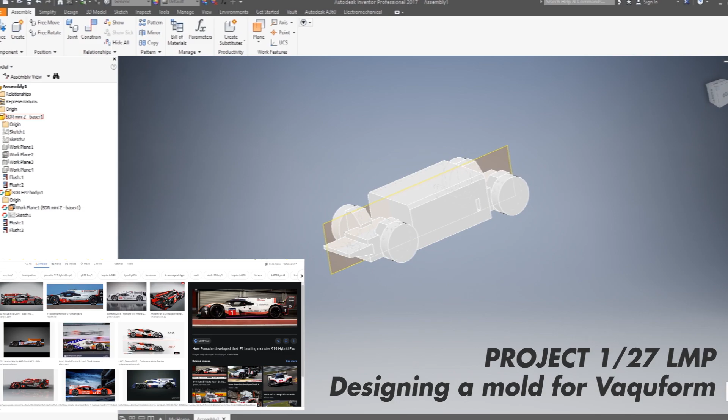Hello, everyone. I'm going to do something a little bit different today because I wanted to show a little bit about the design process when I'm making a mold for my Mini Z's, the 1/27th.

As you can see, I start on the CAD software by placing a very rough Kyosho Mini Z chassis dimension. I'm trying today to do an LMP3, LMP Le Mans type prototype car. I'm not trying to copy the one that is on the screen, I'm trying to do something similar.

I'm starting with the cockpit, which is going to be this kind of teardrop shape with a very rounded edge. This is, in my opinion, the easiest thing to do first. I don't have any other shape that's going to bother me for rounding the cockpit like I'm doing now, so I can have a really nice curve.

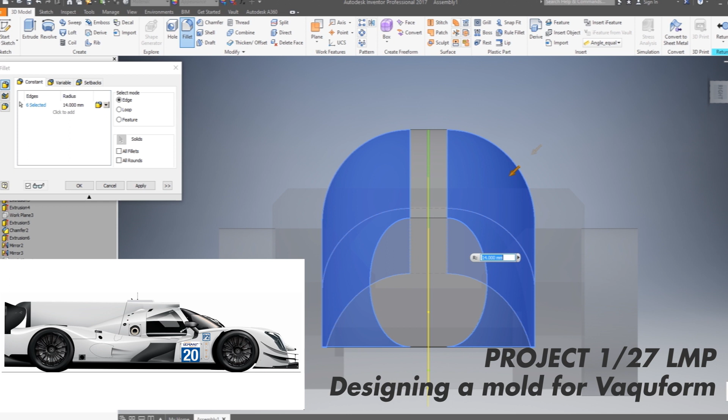I'm keeping on the side of the screen what I'm looking at on Google and what I'm using for inspiration. I'm trying to do something similar to the 2019 prototypes, but I don't want to just copy it line by line, I want to do my own little thing.

Keep in mind as well that I need to be able to fit as many 1/28th, 1/27th chassis as possible, so the proportions are going to be quite different from what you see.

First of all, the wheelbase is not the same. The chassis are quite bulky, you have all the electronics inside and so on.

Right now I'm working on some very rough shapes in the beginning, trying to get a feel for what the car's proportions are going to be like, how long it's going to be.

So I placed the nose, which is going to be only in the middle of the car between the two front wheels. It's not going to go all the way across.

Then at the back, I'm trying to place some kind of aero shapes that are going to be, once again, only for half, kind of the center of the car. Then we'll have the wheel arches and the wheel covers, and the outside of the bodywork is going to be added to that.

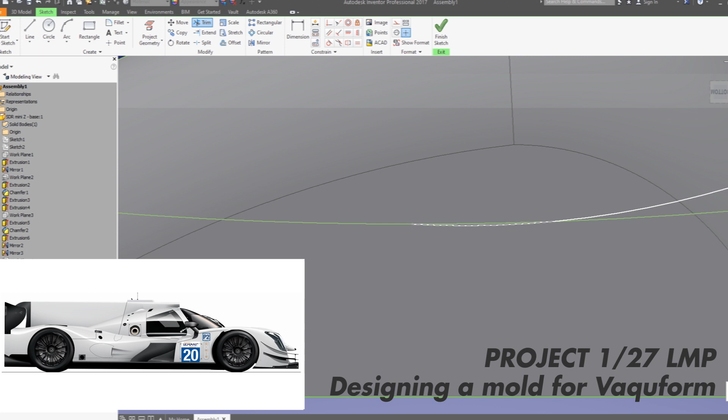So I'm putting my curves, doing a little check, seeing if I'm happy with the general thing, and then I extrude and see how it goes.

It's pretty hard to look at a design in progress. It's not the most pleasant thing, because I have an idea of what I want, and I have a pretty good idea of how I'm gonna get there.

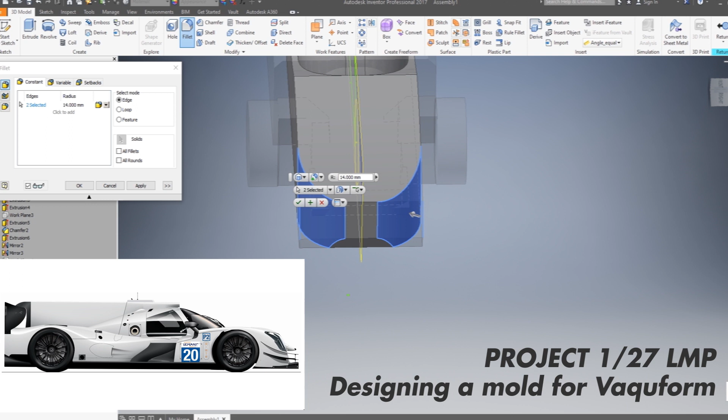Looking at it, I think it's looking a little bit like when my 4.5 year old draws a car for me. So hang on, keep taking a look.

Here you'll see I'm making a mistake that luckily I can repair later: I've made the curve's diameter bigger than the actual width of the front end, so it's not symmetrical. Luckily you'll see later on in the build that I repaired that.

This is a pretty sorry mistake. It's something I did when I was doing the Formula E, and I could not rebuild the model without deleting so many steps, so I ended up doing it by hand later on the mold.

This time luckily I saw it early enough. So as you see now, I've placed a new plane on the edge of this centerpiece that I've done now. That looks like a sad sloth.

On that, I'm going to be drawing what you would see on the white LMP car on the screen, which is the outside of the bodywork around the wheels, from the front to the back.

To the front, I'll do the curve that will include the front light as well. I gotta be careful that I keep something similar to what the car has, where the front lights do not go above the nose that's sticking out like I'm doing now, so I'm going to correct that by placing it a little bit further back.

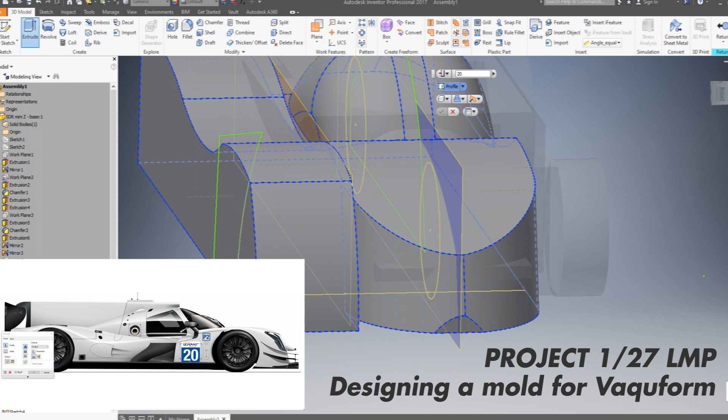This is the kind of thing that happens when I'm just in creative mode. I'm distracted, thinking about so many different steps, and so that happens. It's fine, it's not a big deal. You just need to see it when it happens and catch it in time.

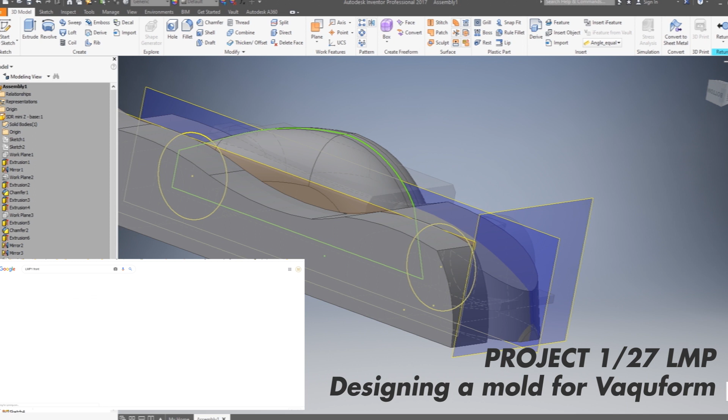So now I'm placing what is going to be cuts from the side of the car. Originally I thought I was going to be doing an extrusion all along, but looking back at the car in the picture, I can see that the center, the black part, is really pushed more inward, and the front of the wheel arch around the lens is different, from looking at the white car.

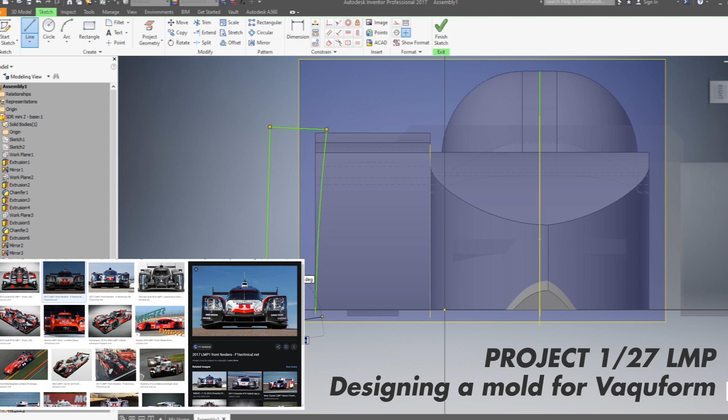So now I'm going to do a little Google research to see what the front of the LMP3 looks like, and they are really boxy, really square. I can't do something that vertical because I'm vacuum forming from the mold, so I need some kind of angle. So I'll do a different profile that I'm going to cut in the front and in the back, and then loft them together. You'll see the option that I'm going to use.

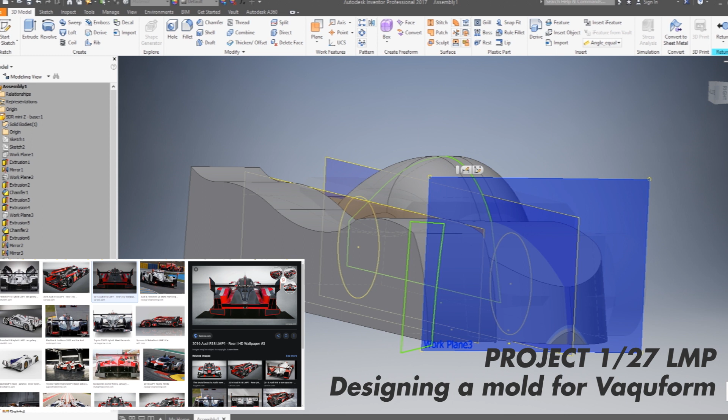So I'm placing the first curve that I want to cut from the front wheel, and then I'm going to place a new plane at the back of the bodywork, and do a quick look on Google for what the back of those LMP1 look like. You see you have those kind of L shapes pointing outward, and it's very straight once again.

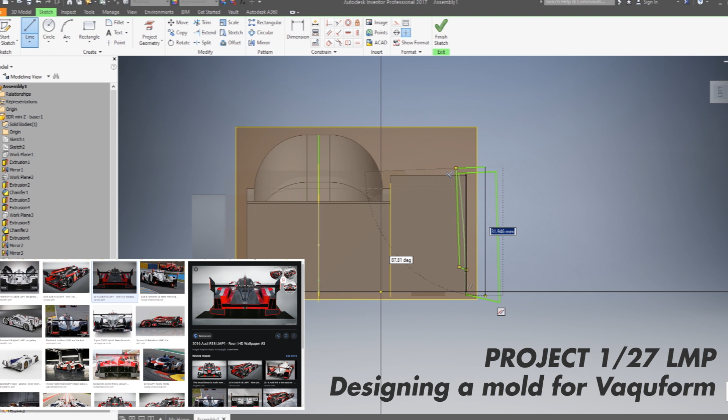So I'm going to try to have this little L cut at the bottom. It's not going to be as pronounced as it is in the real LMP, but I want it to be there. Most of the back of the car I already know is going to be mainly sticker work, so I don't worry about detail and cuts.

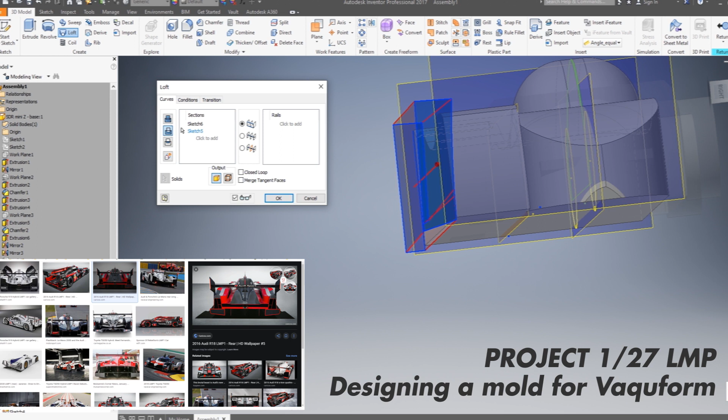I want it completely flat so I can cut any shape that I want later on once the body is vacuum formed. So now I'm placing that little L cut, and I'm going to create a loft between the front curve and the back L shape, if I can call it that. The groove slowly and slowly disappears from the front to the back.

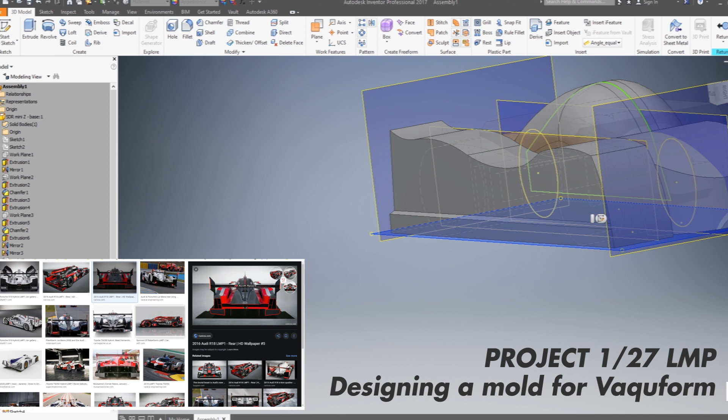That's going to be a pretty cool effect that I'm going to be able to keep. It's going to look a bit more like when you look back at the white car - you can see the carbon chassis parts that are pretty thick at the bottom of the car, and then you have the white bodywork. Between the wheel you have these black parts, and then the diffuser at the back. So this is good, it's going to be something that matches.

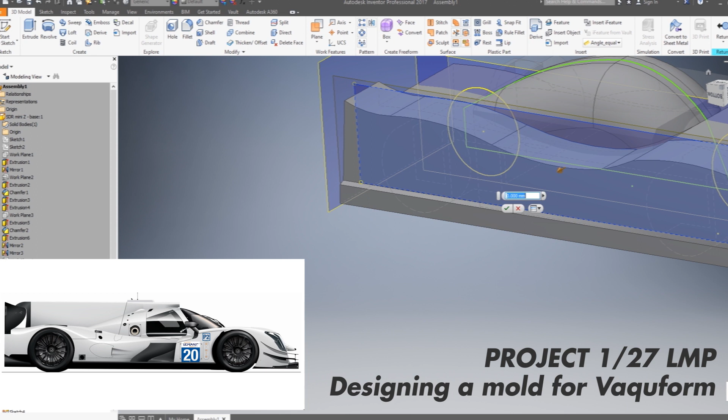So now that I have that, I'm going to be able to work on that. You see next to the number 20 there is this deep groove, deep cut inside the bodywork where the driver's door would be. So I'm going to do something here, basically do the profile shape, just a very rough profile shape that I'm going to extrude as a box in, and then round whatever corners I want to round.

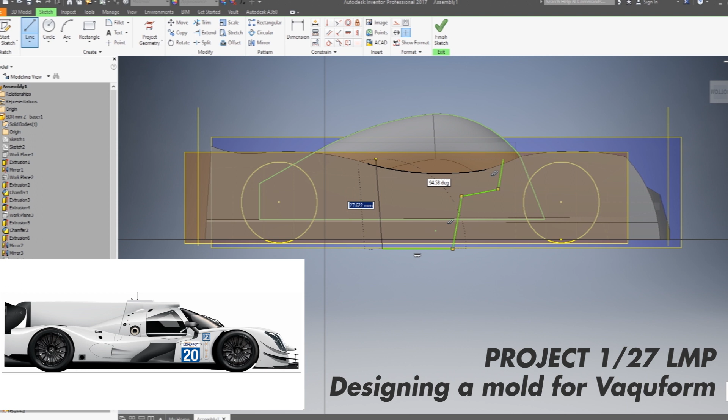To have this kind of triangle effect - if you were to look from the top of the white car, you would see that from the rear wheel this curves inwards to the cockpit later on. So the first action that I'm going to do is extrude that shape inside to have a cut.

Now I'm discussing with myself, do I want to cut the carbon part at the bottom? And I do not want. I want to have this line all the way across that really looks like a straight edge, like it does on the picture I found from Google.

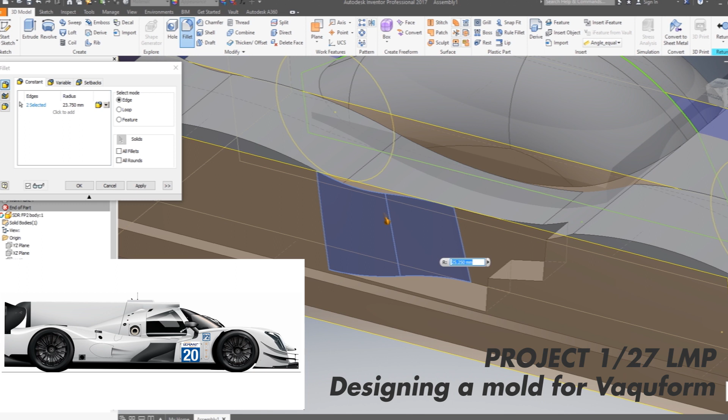So now I'm going to extrude cut, and the back part of it, once I'm happy with the depth, I'm going to curve it. So now I'm going to get this nice curve in that I can increase or decrease as I please. At the moment it's very squarish, the edges are very, very hard, but the general shape is starting to show.

So let's clear out the screen, get rid of a little bit of all those planes that don't need anymore. And now it's going to be time to work on the symmetry, and then I will start to work on making curves.

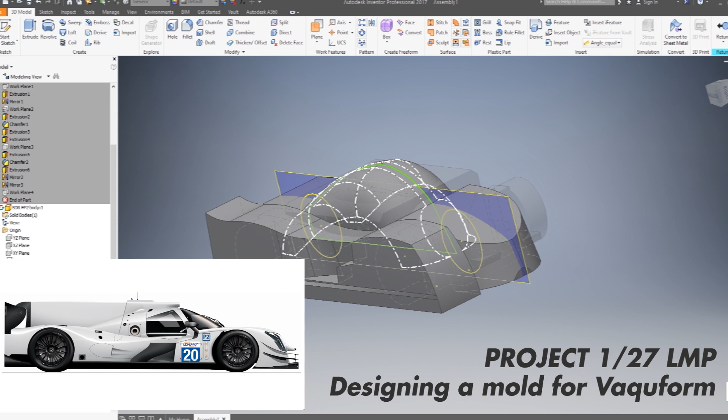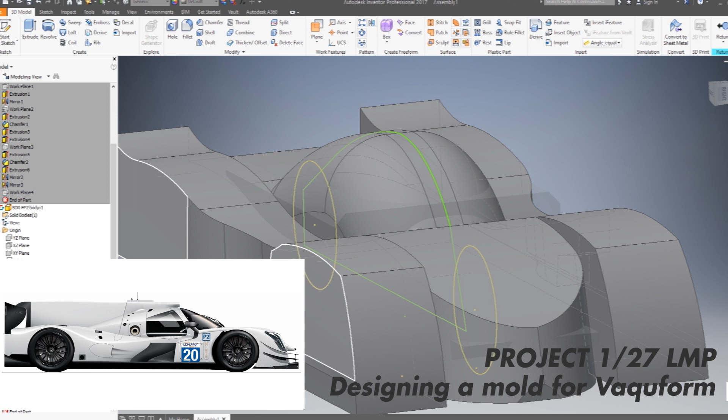I don't want to do too many chamfers and so on too early on. I prefer to have, like if I was doing a sculpture, a rougher, squarer shape in which I can come, once I have a general shape that I like, remove material and round whatever edge I want to round. So now I'm going to work on what the front of the car is going to look like around the front lights.

You see by mistake I didn't select all the lines, and I saw that this little curve went up, and I think that's really cool because it kind of follows this straight line that goes all the way from the back of the body to the front, which is not something you have on the white car, but I feel like this is going to be pretty cool, pretty special.

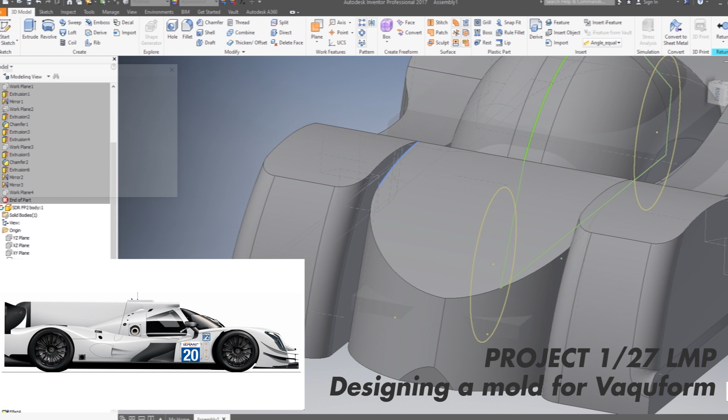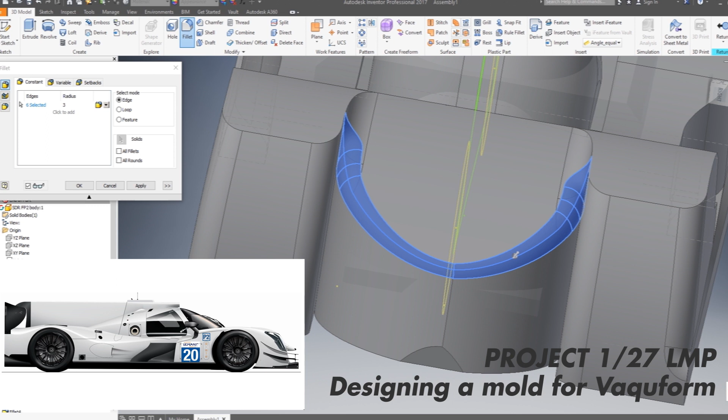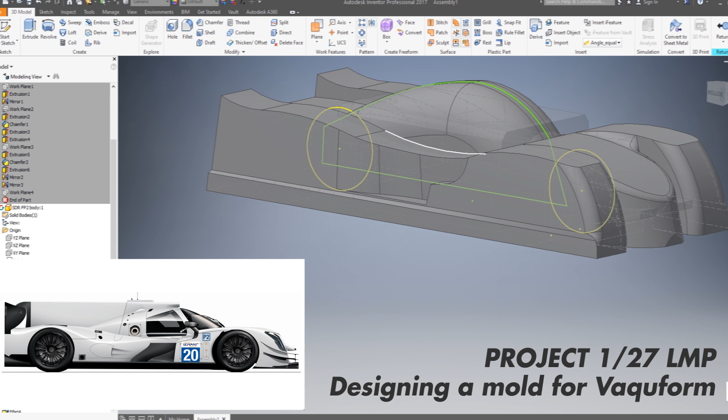Here, those little... so you see the car has the feeling of this LMP car, but I just want to make something more generic, and then I can work on the liveries with stickers.

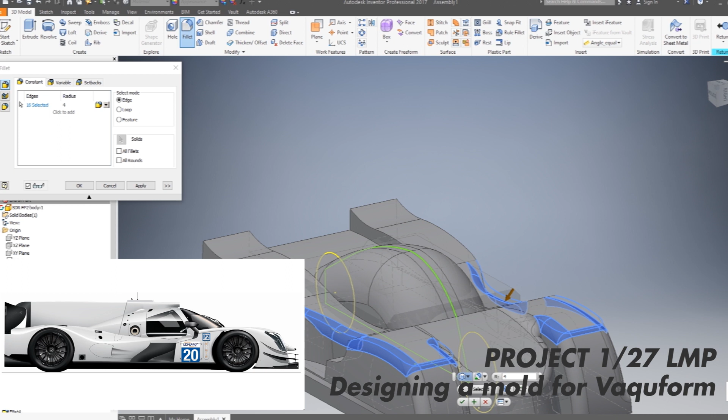I feel Kyosho is really good at making exact replicas, and I know GL has a really nice Toyota one that they did as well, probably licensed. So I just want to make my own thing.

For me, this is something I do. I did a first 30 minutes of design before dinner, and then I went to get some food, and then I came back later on.

It's something you can do in your spare time, and most of the time it's gonna end up in the bin because it looks terrible, and some of the time it's gonna look pretty awesome, and it's gonna become a mold, and then it's gonna become a car you can actually drive, or share with your friends, or sell online, or what have you.

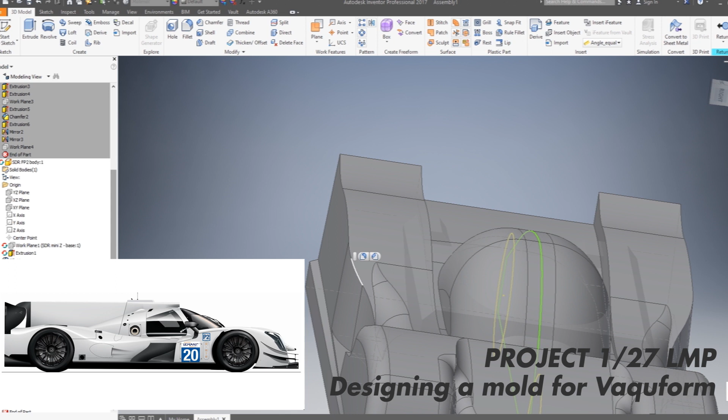So now I'm just working on curves basically, trying to get rid of all those really square angles, really straight edges that are a little bit everywhere. And now the car is starting to take much more shape, and the character of the car is building up.

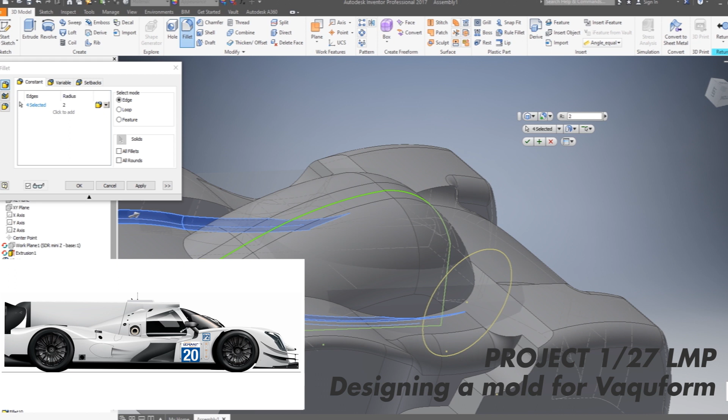So I feel if you've made good foundations with the basic primitive shapes that you created in the beginning, and left yourself enough space for creating curves and cutting material, then you just need to trust whatever vision you have in your head that it's going to come to life.

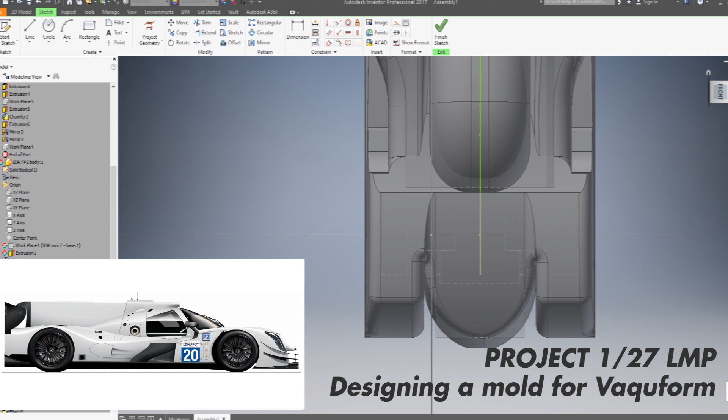And luckily for this one, I'm really pleased with the end result, and you'll see this project going all the way from that evening drawing to the 3D printed mold, and then I'll try to make a whole series of the entire process, from doing the CAD to printing with the material I have.

So as I explained last time, I only have the Up Mini and Up Mini 2, so small bed printers.

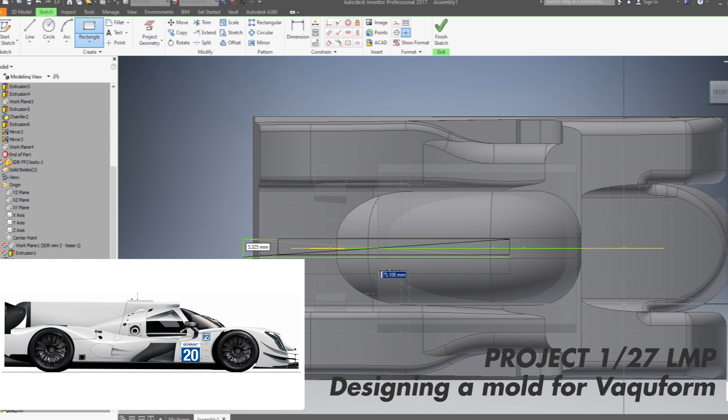I'll do a full series on that because I think it might be cool and interesting for other people that either want to do CAD drawing, or want to design cars, or want to do what I'm doing, which is make their own mold for their own minis or bigger cars.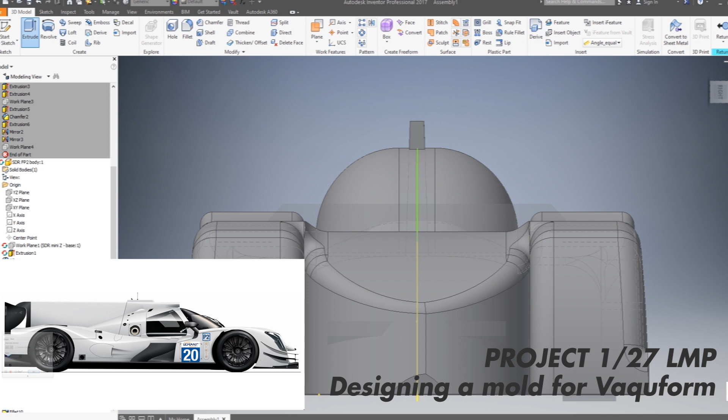So now I'm doing this very flat aileron that is at the center of the car, this big center wing. For something that vertical, I don't want something too thin, first of all, because I'm gonna have to spray paint it. And you need to make sure on these kind of parts that you leave an angle to be unmolded, because this is the kind of part that will stick your mold into the plastic once it's vacuum formed. So this being that tall, I put a smaller angle because I started it at the very base. But you see how much angle I put into it, so this is going to come out of the mold easily.

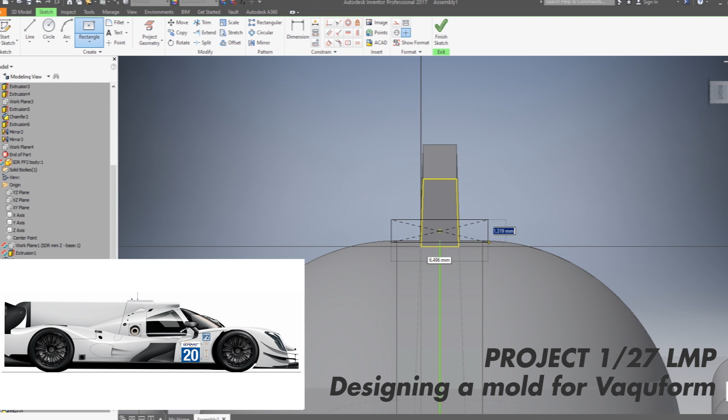Now, it is clearly a part that might break. I have never done something that thin and that tall, so I don't know if this is going to be a part that easily breaks in the mold. If that's the case, I'll have to think about doing this part separately. At the moment, I'm just crossing my fingers. I think there's no reason for it not to work if the angle is properly done.

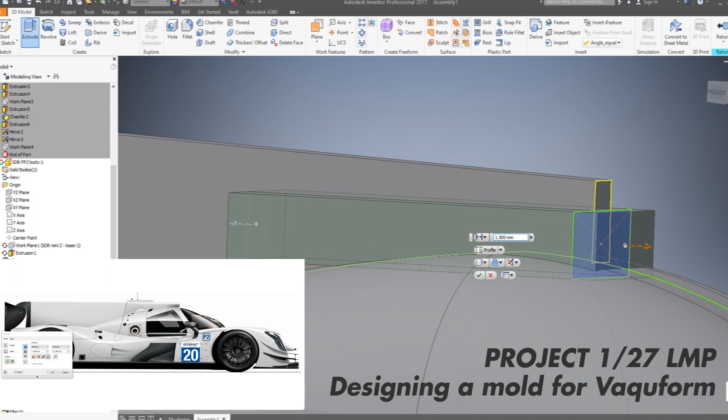And I'm gonna beef it up a little bit with the part I'm doing now, at least in the front. I'm doing this kind of little air scoop, like you have on top of the white car over there.

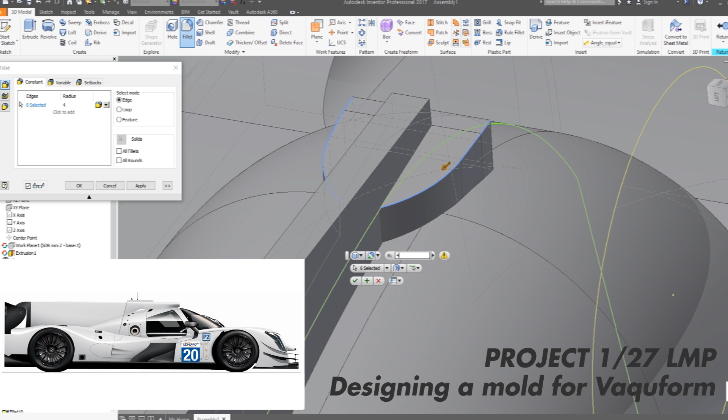So once again, basic shape, angled properly, and then I have all my fillets. I'm rounding all my angles after that. So I'm starting by closing the back of the box, making the circular angle at the back, so I have this kind of forward shape, and then I'm gonna do the rounding of the top edges.

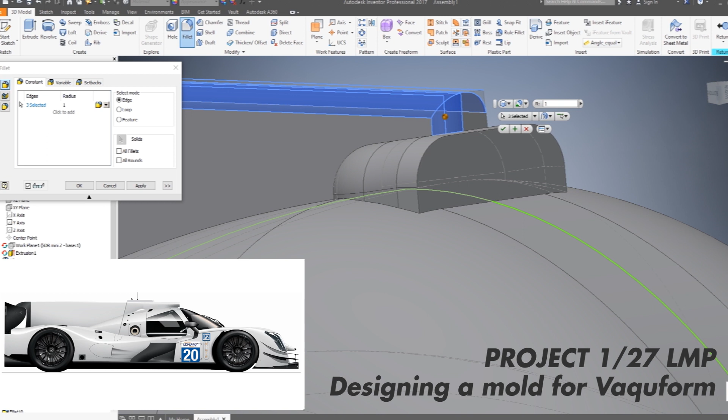And then I'll have to do the whole central wing thing. I don't know any technical terms, so it's a wing thing. I love cars, I love car racing, but I don't know any proper terms, so forgive me and complain about it if you want in the comment section. I'll be glad to know more terms so I can sound a bit less stupid next time.

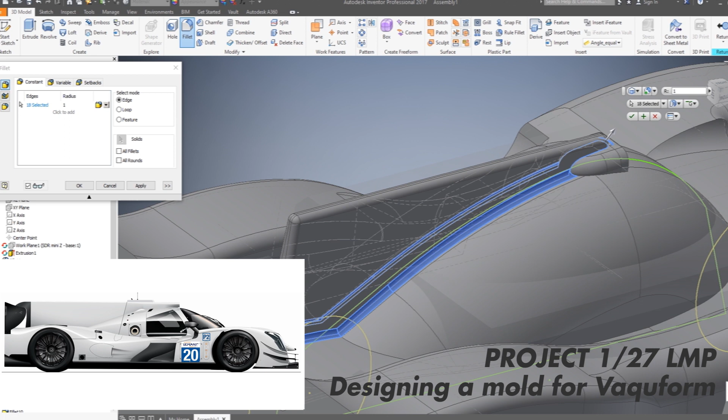All right, so here you go, I have my big center Batman wing. I'm now doing a little bit of chamfering at the bottom in order to have it... now here you go, you see, I got greedy there. Get rid of those curves, they're not going on the top of the scoop. Out, out, we just need the... yes, good, good.

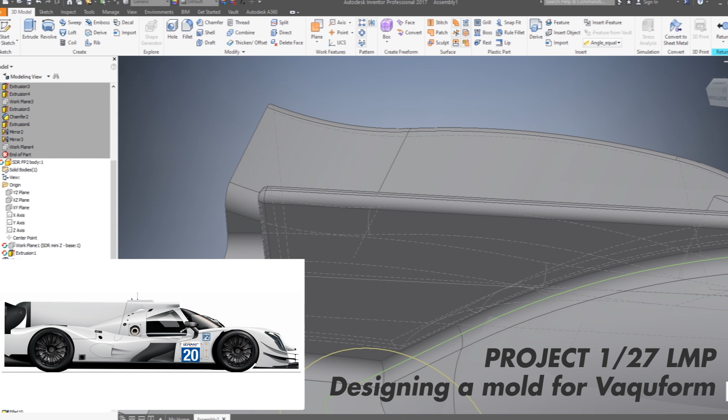So those are gonna be, first of all, easier to sand and to clean up, and then it's going to be a good strengthening part as well. And so I'm trying to do some curving all around the cockpit now in order to have all the shapes flow easier with each other and have something a little bit more organic.

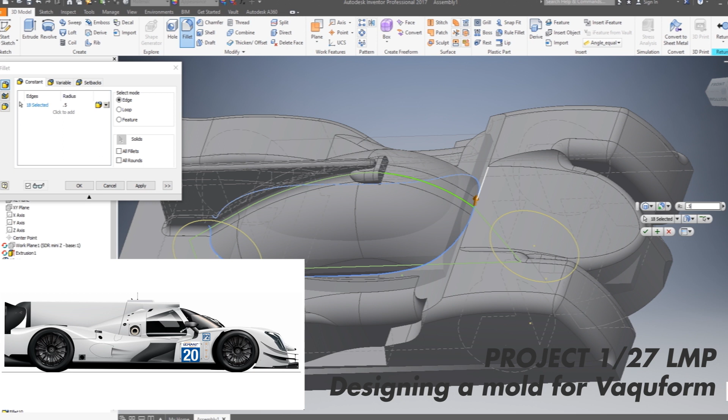You see there is less and less straight edges on the car. The back's still pretty straight, I got a couple of curves on the top near where the doors are, but other than that, the car is starting to take a little bit more shape now.

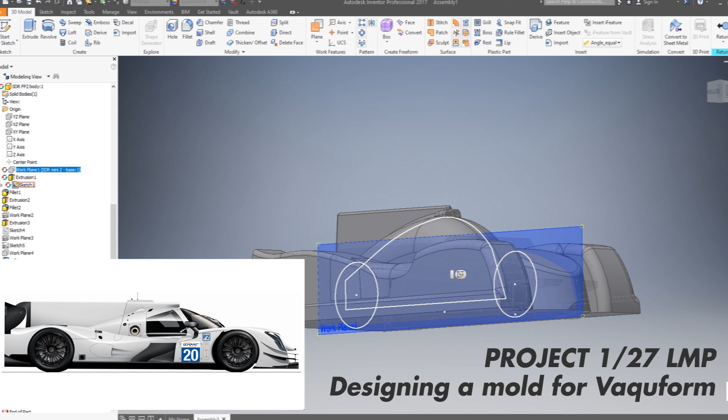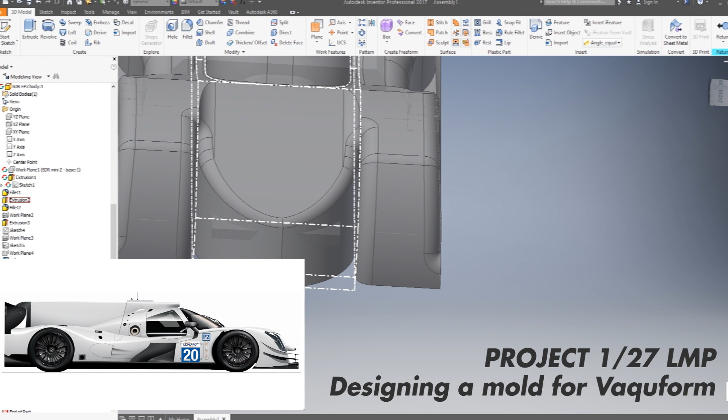Okay, I think I'm going to stop this for now and leave you with a pretty rough looking 3D model, because I think I've been babbling for far enough and everybody's probably asleep by now. So we'll see what I have now, and I'll let you criticize it and complain about it in my bad terms, and I'll do the next part tomorrow where I finish these parts of the design as well as the spoiler at the back and the spoiler mounts left and right.